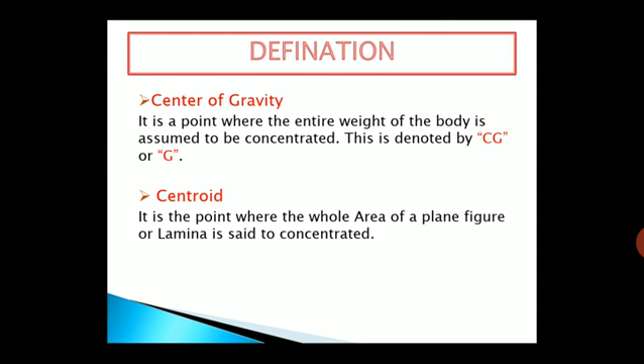So let's come to the axis of symmetry. In case of symmetrical figures like rectangle, square or circle, the figure can be divided into exactly equal portions along the axis, which is known as axis of symmetry. Yes, this is the axis which divides the figure into exact equal parts.

For example, if we take a rectangular paper and we want to cut the paper into two parts, what do we do? We fold it, and at the fold we cut that paper. So in this case the fold which we have made is nothing but the axis of symmetry, because along that fold when we cut we have two parts of a paper.

Secondly, I'll take a common example of a lemon. If we want to cut a lemon in the kitchen, we cut it such that we get two equal halves of the lemon. So the axis along which we are cutting is nothing but the axis of symmetry.

So we can get two types of figures. One is where we have symmetry along both the axes. Example, if I take a circle and draw a horizontal diameter, the diameter becomes a symmetrical axis, because if I cut along the diameter, I'll get two equal parts. Similarly, if I consider the vertical diameter as a symmetrical axis and cut along it, again the circle is divided into two equal parts.

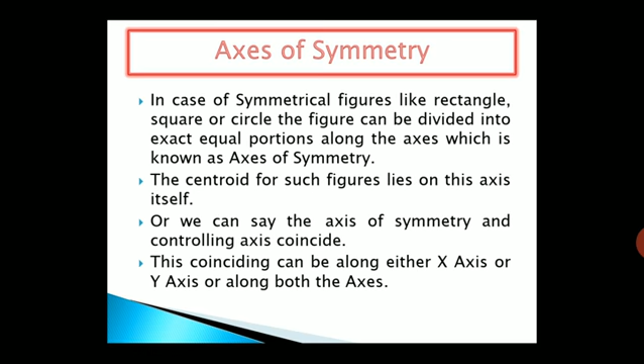Next comes the centroidal axis. It is that axis which passes through the centroid or center of gravity of the figure. Now for symmetrical figures, the centroidal axis and the axis of symmetry overlap because both are the same.

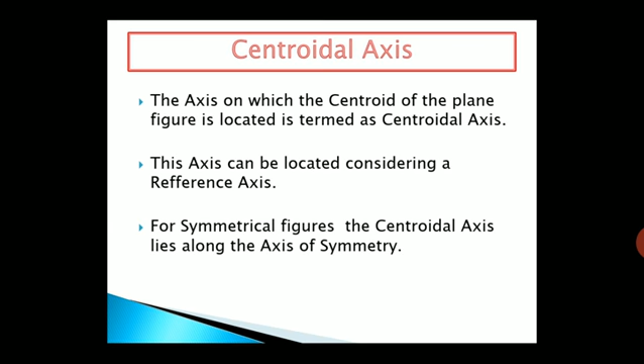Next is axis of reference. It is any general axis or standard axis which is taken as reference. Now we have our x-axis and y-axis which we use commonly while drawing a graph. They are reference axes. With respect to them, we can locate the centroid or center of gravity of a figure.

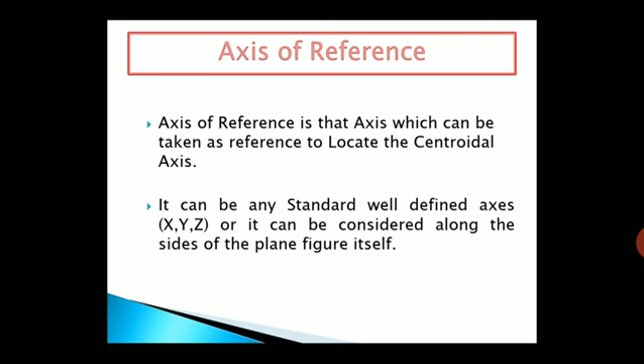Now this sketch here which I have put is just an example where we can recognize the different axes. Now your x and y axis are your standard axis, which are your axis of reference. Now CG, which is marked and shown in green color, is your centroidal axis. Now the figure taken is rectangle in shape.

That means it's a symmetrical figure about both vertical as well as horizontal axis. Hence, in this case, the axis of symmetry coincides with the centroidal axis. Okay, that means that both are same.

So here if we want to locate the center of gravity, that is the C point which is shown on the figure, you can locate it with respect to x-axis, that is finding the vertical distance, which we term as y bar, or you can locate it with respect to y-axis also by finding the horizontal distance, which we term as x bar.

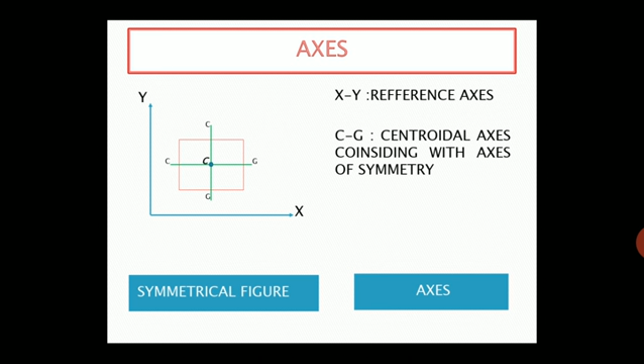So basically the coordinates of your centroid are x bar and y bar. Okay, so that is what we need to find in this chapter, locating CG of the given figures.

So now let's come to the formula by which we can locate the CG. For symmetrical figures it is very easy because the center itself is the CG. But when we have unsymmetrical figures or plane laminas, how can we locate the CG? This derivation will give you the idea for it.

Now let us consider a body which is having a total area capital A. Let x bar and y bar be the coordinates of the CG of the entire body. Okay, clear? Now let us divide that body into small elements, each of area say A1, A2, A3, so on up to An, such that their centroidal distances from the axis are x1, x2, x3, so on up to xn, and y1, y2, y3, so on up to yn.

That means the entire area A is divided into small elemental areas A1, A2, A3, such that if we add all the small elemental areas, we'll get the same area, capital A. Now, in this case, our task is to find x bar and y bar.

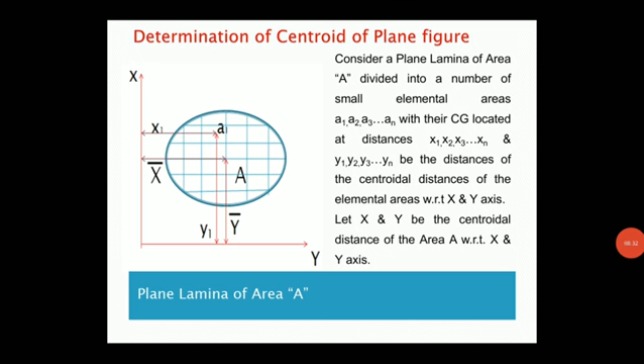So, applying the theorem of moments about y-axis and x-axis, we get A into x bar is equal to A1x1 plus A2x2 plus A3x3, so on up to An xn. Now what this theorem of moments for an area is: A is the entire area, whereas x bar is the centroidal distance of the entire area.

So it can be written as what? We'll take an individual element and multiply it with the x value for that particular element. And when we do the summation of all that, the equation which we get is A into x bar, that is the total area multiplied by the centroidal distance, is equal to an individual area multiplied by its centroidal distance, and summation of such gives us x bar.

So in the below formula, if we cross multiply, summation of Ax is nothing but A1x1, A2x2, and so on. A is shifted to the right hand side, it goes to the denominator, and we get the formula for x bar as summation of Ax divided by A, where summation of Ax is A1x1 plus A2x2 plus A3x3 and so on, whereas capital A is the total area.

Similarly, we'll get y bar as A into y bar is equal to summation of Ay, that is, summation of Ay is A1y1 plus A2y2 plus A3y3 and so on, divided by A, which is the total area.

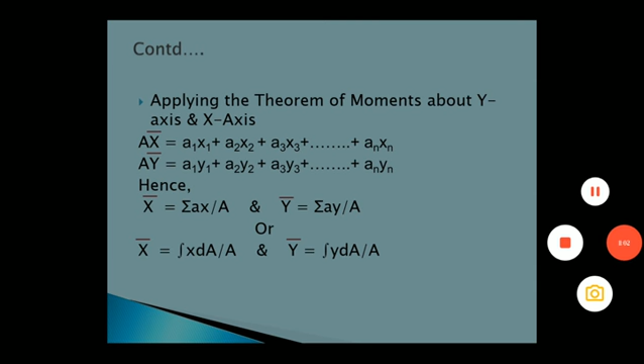Whereas if you would have taken a rectangle instead of a triangle, rectangle is symmetrical about both the axes, therefore its centroid is the center itself. That is, if the height of the rectangle was h and width was b, then we would have got the centroid directly as b by 2 and h by 2. But here in case of this triangle, it is not that case, so we need to derive it.

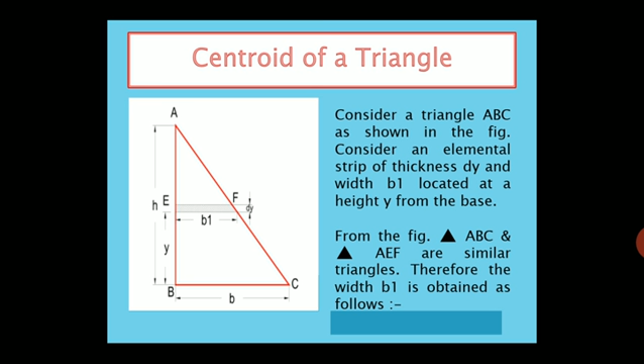So now here in this figure we get two triangles. One is our main triangle ABC, second triangle is AEF, which we have got by taking an element which has a thickness or a depth of dy. Hope the figure is clear. It is straightforward. Then further, let's find the value of b1.

We'll use the principle of similar triangles. Make a note, here we are applying the principle of similar triangles. The two similar triangles considered here are AEF and ABC. So let us take the ratio of its sides. b1 upon b is equal to height of the smaller triangle, h minus y, whereas height of the bigger triangle is h. So by cross multiplication we get b1 as (1 minus y by h) into b. So this is the value of b1.

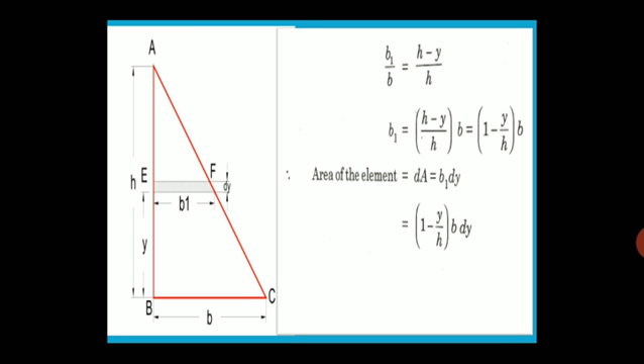Therefore, what will be the area of that element? As it is a very small element, let us consider it as a rectangle. The area of the rectangle is breadth into depth. Here breadth is b1 and depth or thickness of that elemental strip is dy. Therefore, the area of the elemental strip, we are taking it as dA. dA is equal to b1 into dy. Substitute the b1 value we found on the top, that is (1 minus y by h) into b into dy.

Now area of a triangle, this formula is half base into height. So from the principle of moments, y bar is equal to integration of y into dA upon A, that we have derived earlier. Now this A value we know directly, that is half base into height. So let us find integration of y into dA. As we have taken the strip horizontal, the limits will be from 0 to h.

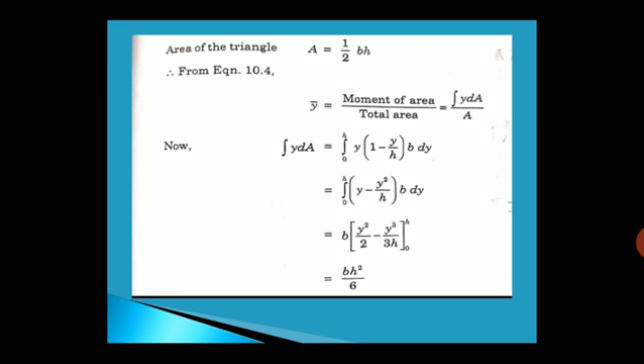So substituting the value of dA, y into dA, and integrating it, we get the answer as bh square by 6. So integration of y into dA comes out to be bh square by 6. We are locating the element in the horizontal direction and its height is taken with respect to the bottom or the base of the triangle. Hence we are taking the variations along the height of the triangle, which varies from 0 at the base to h at the top. Hence our integration limits become 0 to h.

Therefore, substituting, we get y bar is equal to bh square by 6 divided by the area. First we apply the limit 0 to h and then substitute it and get the value of y bar. Solving, we get y bar as h by 3. What does that mean? From the base of your triangle, y bar lies at a height of h by 3. For example, if the height of the triangle is 6 meters, the centroid from the base will lie at 6 divided by 3, which is 2 meters.

Similarly, if you want to locate the centroid from the vertical side of the right angle triangle, it will come as b by 3, whereas when you locate from the base, it will come as h by 3. Therefore, the centroid of the triangle, you can write it as CG is equal to x bar comma y bar. For x bar, when you derive similarly, you will get b by 3, and for y bar you will get h by 3. In the next class I will give you the other triangles or the formula list.